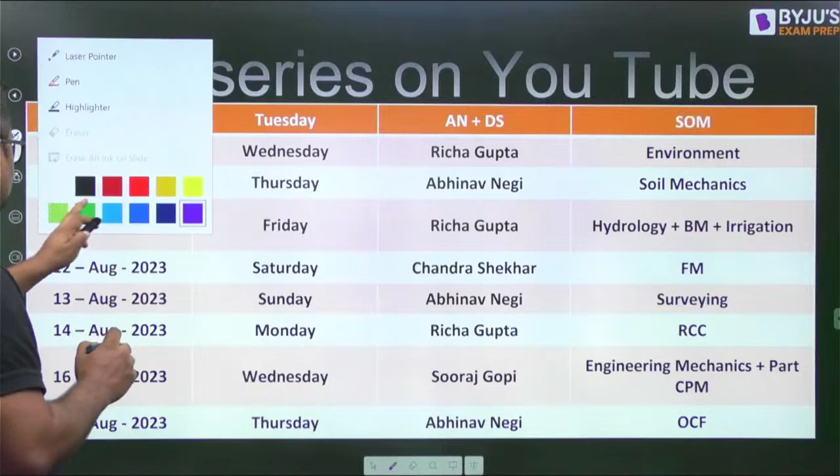Now, me and Dheeraj sir are taking SOM. The next day will be Richa ma'am for environment, then soil mechanics, then hydrology. Every subject will be done, guys. This is very important because there is no text book of MSQ available till now.

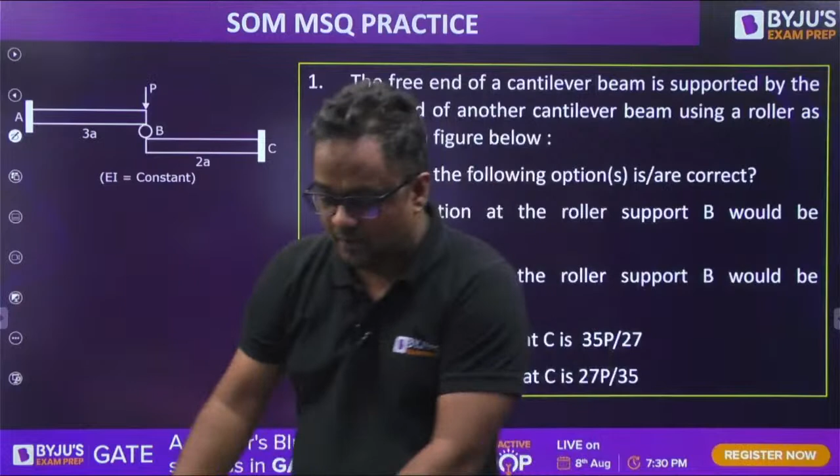Now, me and Dheeraj sir will be taking the questions. Let me take a couple of questions, question number 1 and 2, and then Dheeraj sir will come with a super duper MSQ question. Everybody please let me know your answers in the comment section. Take your copy and pen along with you so you can answer faster. If somebody is on the bed watching the session, please take the most advantage.

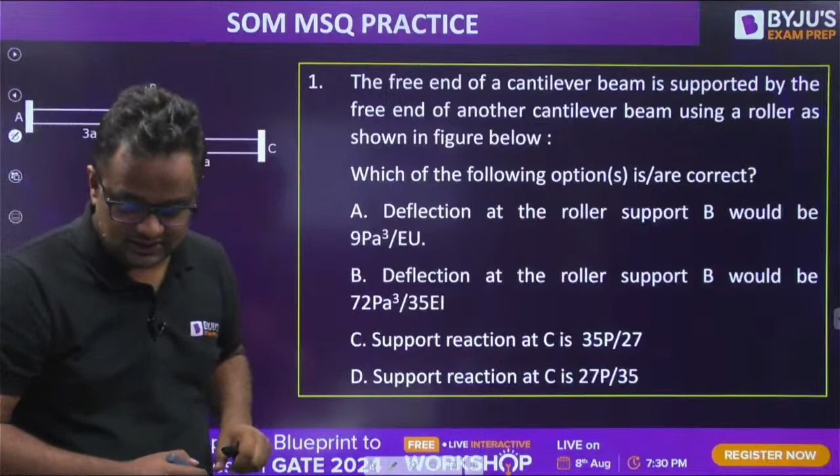We were asked which of the following is correct. So if I draw the free body diagram, this is A, this is B, and in B this P load is acting. This is C here, and this is B here. Now, if it is touched by a roller support, there will be a reaction here, equal and opposite on both sides. This is R. Now, as both of them are jointed like this...

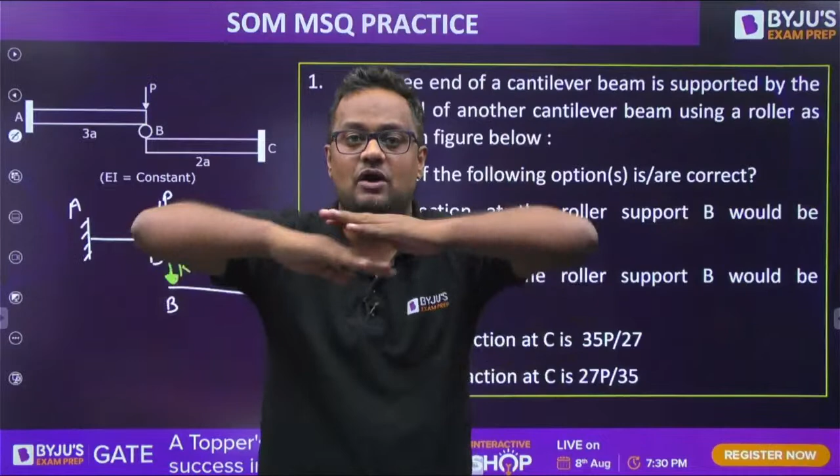So if it is going down, then my right hand and left hand go down by the same amount, since they are joined by the roller here. If they are going down, then both hands move down by the same amount, guys.

Now the deflection of both will be the same. So the deflection here will be P minus R, times distance L cube, that is 3A whole cube by 3EI. And the deflection here will be R times L cube, that is 2A whole cube by 3EI. Now, solving from here, what is the value of R? The R value is 27P by 35.

Now the deflection of the roller support at B. Put R here or here, both are equal sign. Either put here or here, you will be getting the B option.

Give me yes or no in the comment box, guys. Have you enjoyed this question? Everyone tell me. Okay, let me drink the water that Dheeraj sir has brought.

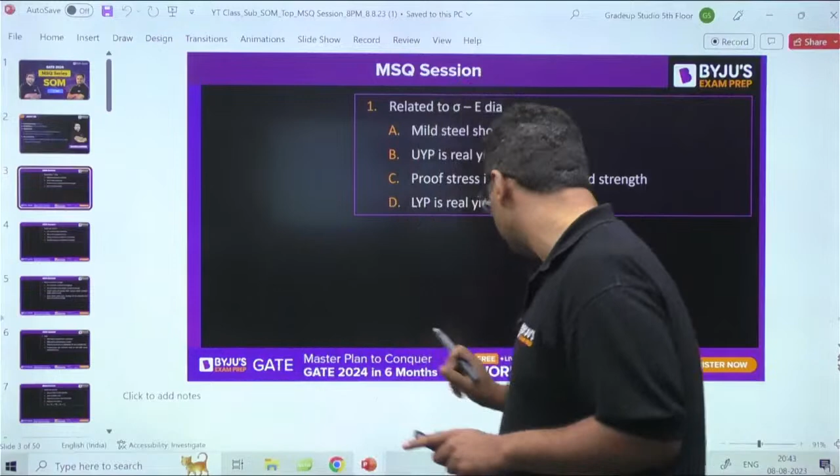Okay, so let us see. Abhinav sir would be joining after 5-7 minutes, let us see 5-7 questions here. This is related to the stress strain diagram. I have made majorly conceptual questions because students shared that they are facing issues in the MSQs which are related to concepts rather than numericals. So taking that into account, out of 50 questions, 30 are theoretical and 20 are numerical.

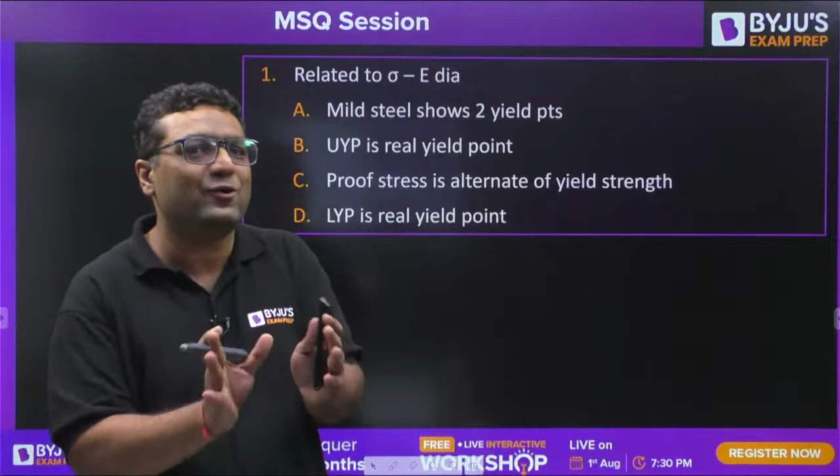So Vinod is saying ACD. The question is related to the stress strain diagram, so they are asking about it. The first option is mild steel shows 2 yield points. Upper yield point is the real yield point. Proof stress is alternate to the yield strength. Lower yield point is the real yield point. So what do you feel out of the 4? Alekia saying ACD, Parth saying ACD, Kiran saying ACD, Abhishek Thakur - what is your answer, Abhishek?

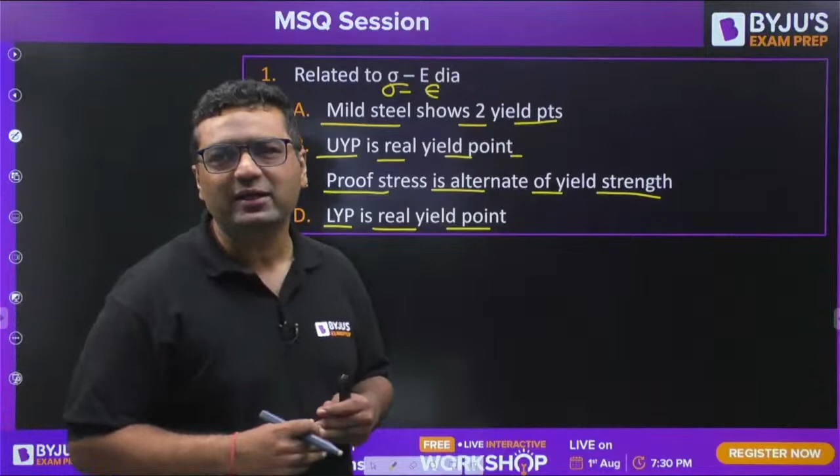So guys, majority of you are getting the answers as ACD. Let us see whether they are correct or not.

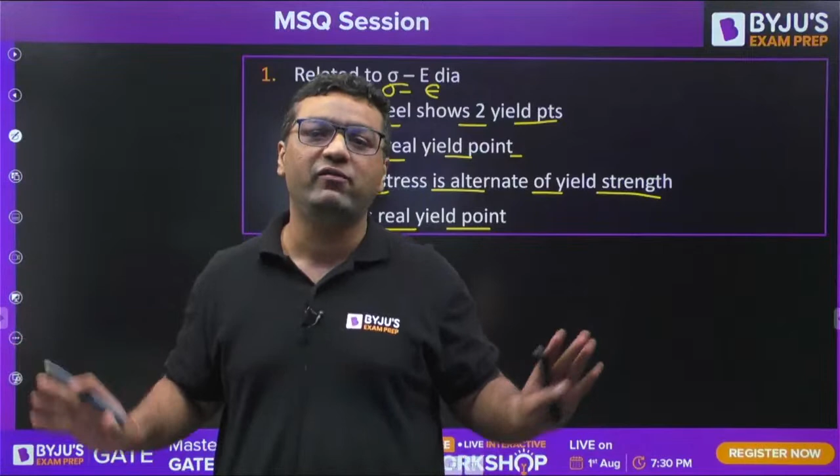The first answer is mild steel shows 2 yield points. I would like to say, in this universe, mild steel is the only material which shows 2 yield points. There is no other material which shows 2 yield points. So guys, that is why A is correct.

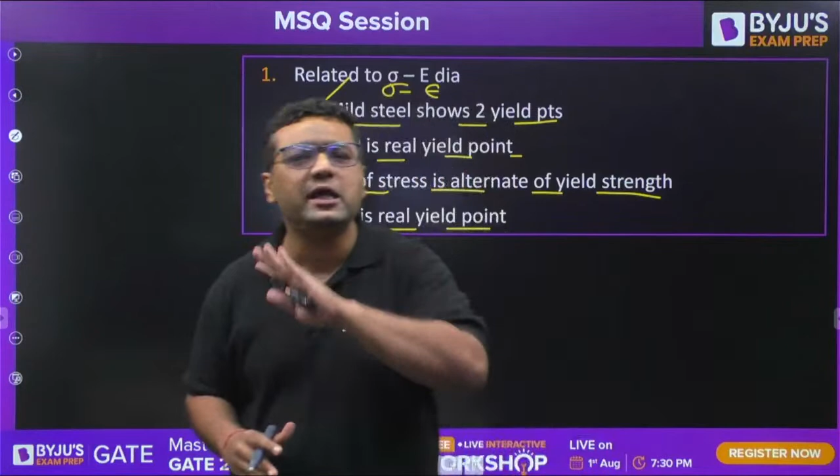Second is upper yield point is the real yield point. No, upper yield point is not at all the real yield point. Why? Because when we talk about upper yield point, it changes when you change the machine, it changes when you change the component, it changes with the environmental condition. And property is independent of all these factors. That is why B is going to be a wrong answer.

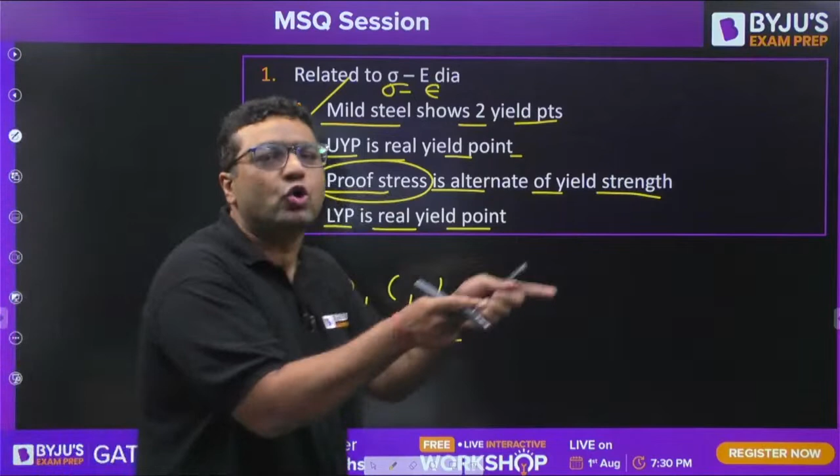Then, proof stress is defined for those materials only which do not show a clear yield point. That is why proof stress is an artificial yield strength for the material which does not show the clear yield point. So that is why C is correct.

And guys, lower yield point, yes, it is the real yield point. And whenever you say the yield stress SYT, that is corresponding to the lower yield point only, because that is the real yield point of the material.

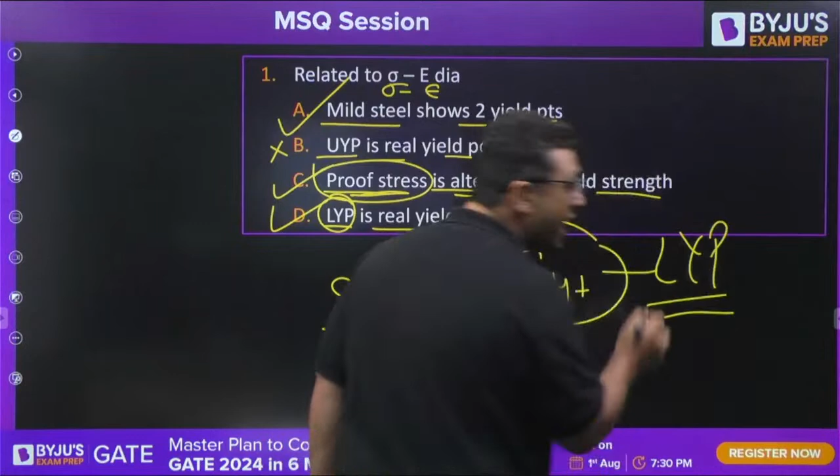So guys, moving to the second question, it is related to the properties. So sir has taken majorly numericals, I have taken conceptual questions.

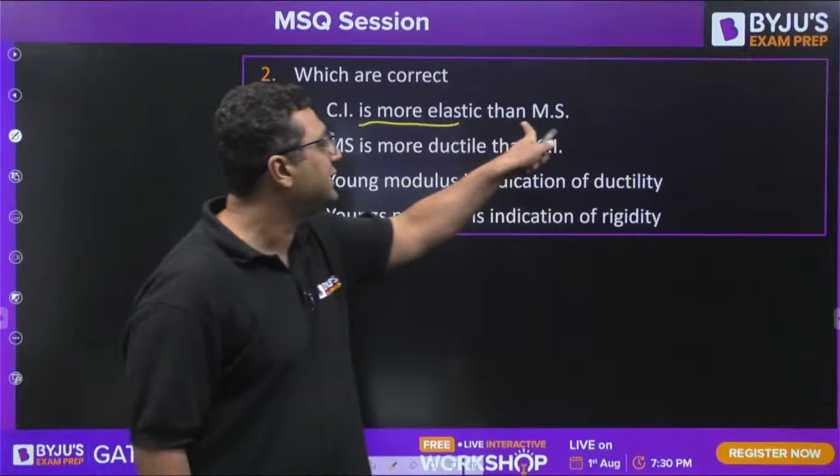So this is the second question, guys. Cast iron is more elastic than mild steel. Then mild steel is more ductile than cast iron. Then Young's modulus is the indication of ductility, and Young's modulus is the indication of rigidity. What do you feel, guys?

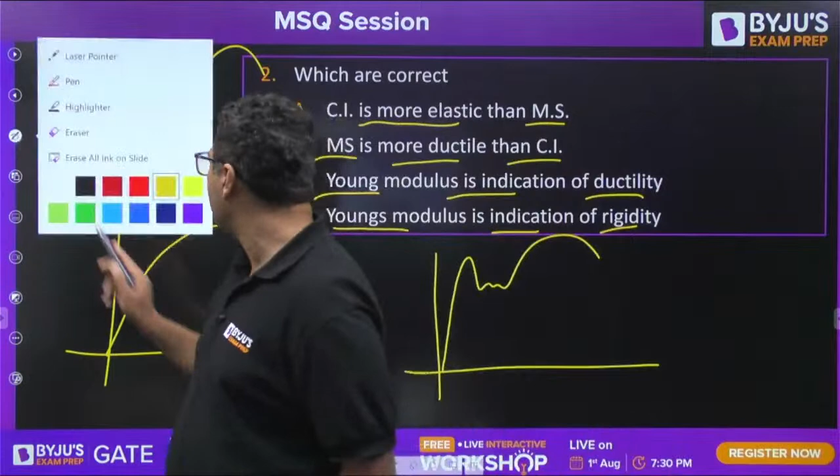This is the stress strain diagram for mild steel, and this is the stress strain diagram for cast iron. If you want to superimpose them, this is for mild steel, and for cast iron I will show with a different color. It is going to be like this. So you can see, this is the slope of cast iron, this is the slope of mild steel. That will give you some idea about the answer. We know this, Alekia is saying B and D.

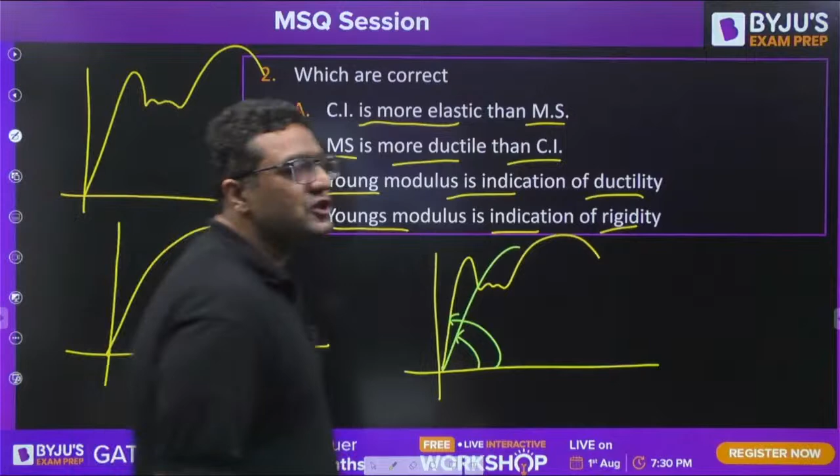So first of all, we will see that, is cast iron more elastic than mild steel? Which material is more elastic, which is less elastic? It is given by their elastic region.

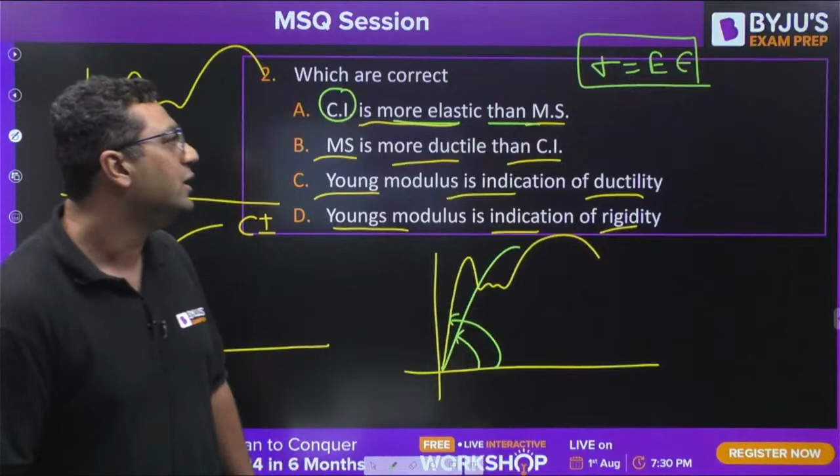If I ask you sigma is E times epsilon, can you tell me, is it valid in the elastic region or plastic region? When we are talking about Hooke's law, is it valid in elastic region or plastic region? Sigma is E times epsilon, that is Hooke's law. Please tell me, is it valid in elastic region or plastic region? It is valid in the elastic region.

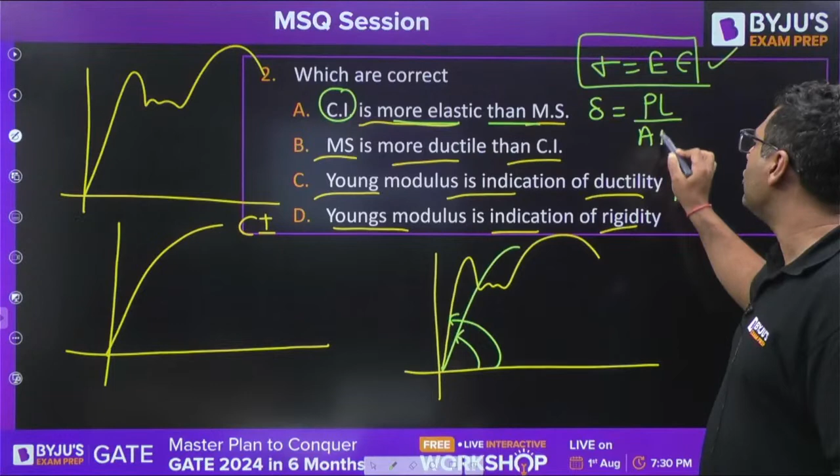You are aware that delta is going to be PL upon AE. You know that from this formula you will be getting delta is PL upon AE. And if E is going to be more, then this deformation will be lesser. So if we are considering the same load, if E is going to be more, delta is going to be lesser. So what do you mean by that?

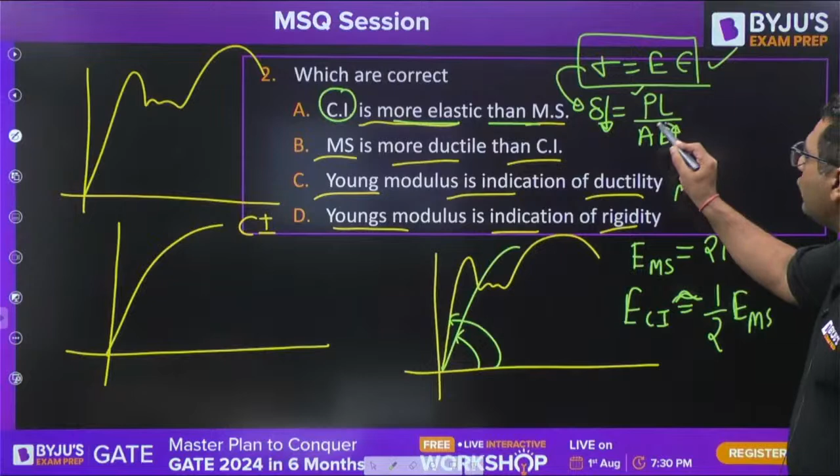What do you mean by that? I would like to say, for mild steel, when we find out the Young's modulus, it is coming out to be 210. And when we talk about cast iron, it is coming approximately half of mild steel. So it means Young's modulus would be lesser for cast iron. And if it is lesser, obviously the deformation will be more.

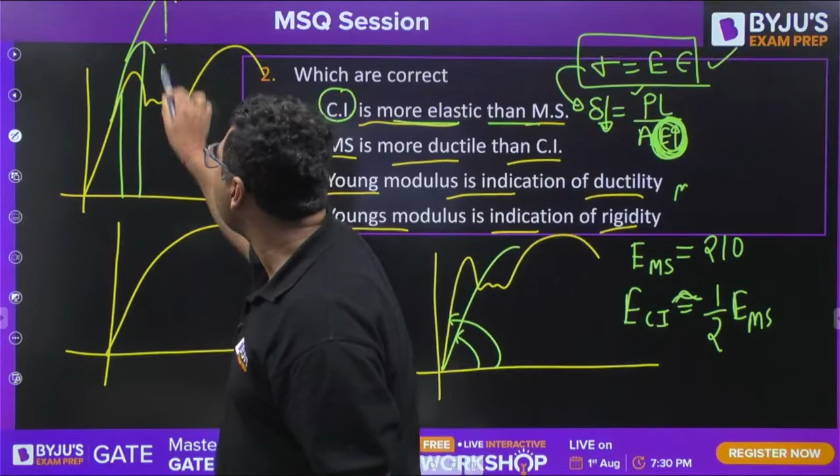And if elastic deformation is going to be more, we will say cast iron is more elastic than the mild steel. Generally students have doubt here. Elastic deformation cast iron is showing more. Even if you compare low carbon steel, medium carbon steel, high carbon steel, you will see this is for low carbon steel, this is for medium carbon steel, this is for high carbon steel. You can see the elastic deformation is more for medium carbon steel, even more for high carbon steel. So whenever we are talking about cast iron, it is more elastic than that of the mild steel.

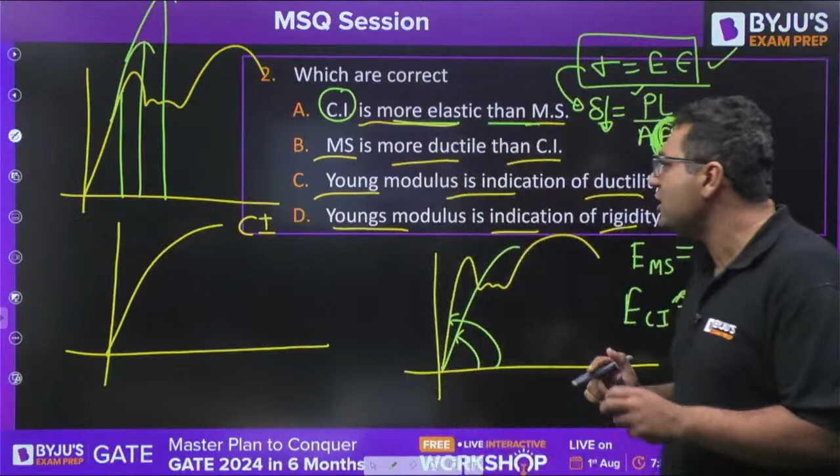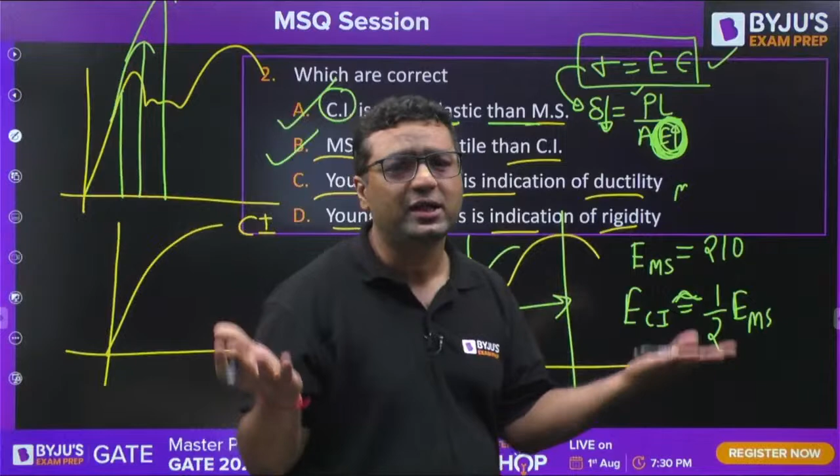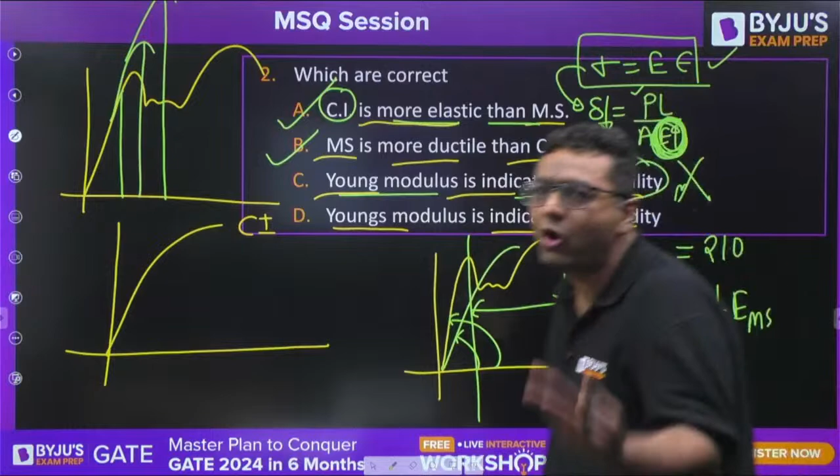And when you talk about ductility, ductility is shown by the plastic deformation. Like this is going to be the plastic deformation. So plastic deformation is more for the mild steel or the low carbon steel. So yes, cast iron is more elastic than mild steel, and mild steel is more ductile than cast iron, because plastic deformation is shown by mild steel and elastic deformation is shown more by cast iron. Then, Young's modulus is the indication of ductility? No, because Young's modulus we are not defining in the plastic region, whereas ductility means the permanent deformation only. So that is why C is wrong.

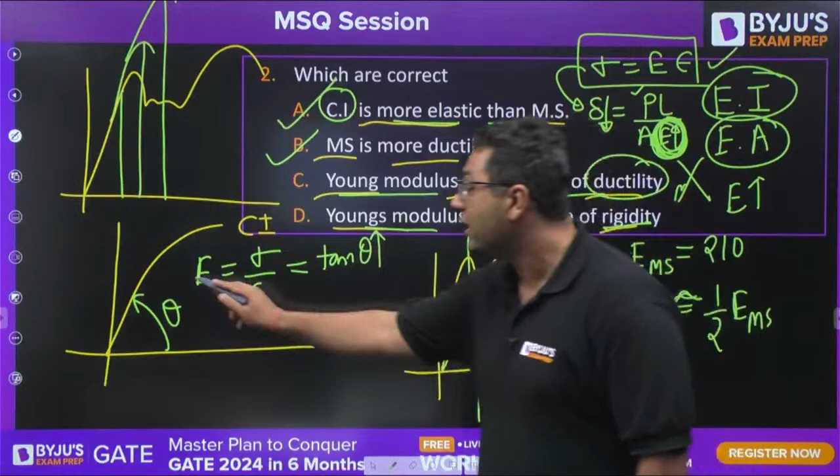Young's modulus is indication of rigidity. Yes, you say E into I as the rigidity, you say E into A as the rigidity. This is axial rigidity, this is flexural rigidity. So if E is going to be more, rigidity will be more. If the slope of the curve is more, you know that Young's modulus is defined as stress by strain. If this angle is theta, Young's modulus is nothing but tan theta. So if theta is more, tan theta will be more, Young's modulus will be more. More theta means the curve will be going towards the y-axis.

At y-axis, what is the value of strain? At y-axis, what is the value of x? Guys, please answer it. What do you feel? Anybody? Abhishek, Parth, Alekya, Vinod? Yes. What is the value of x on y-axis? Is it 0?

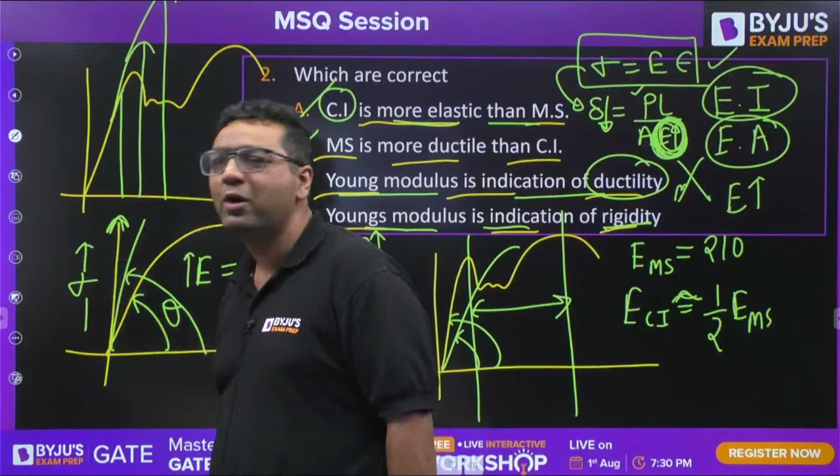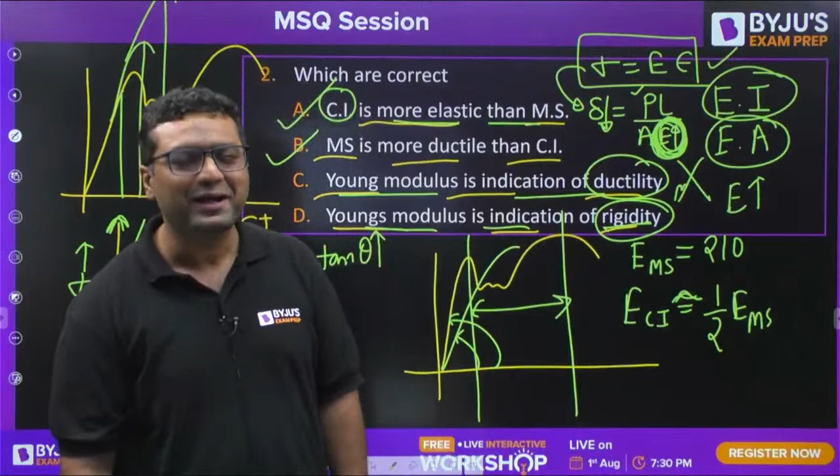So if on y-axis x is 0, then on the stress axis strain is going to be 0. So if strain is going to be 0, what do you mean by that? The body is going to be rigid. That is why Young's modulus is the indication of rigidity. If Young's modulus is more, the body will be moving towards rigidity, as it is going to take the body towards the y-axis.

Okay, so moving to the next question. After that question, Abhinav sir would be joining us. So guys, let me take some other question now, because otherwise you will be saying sir is taking all the theoretical questions.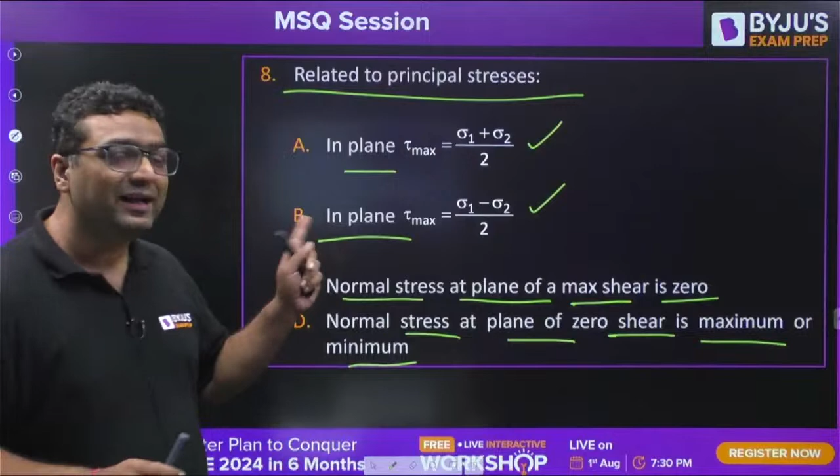Yes. So Parth is saying B and D are the right answers. Kiran is saying B and D. Okay. Who is Papa ka pagal son? Papa ka pagal beta. Okay. So BD. Vinod is saying BD. Alekya, what do you feel? What should be the answer?

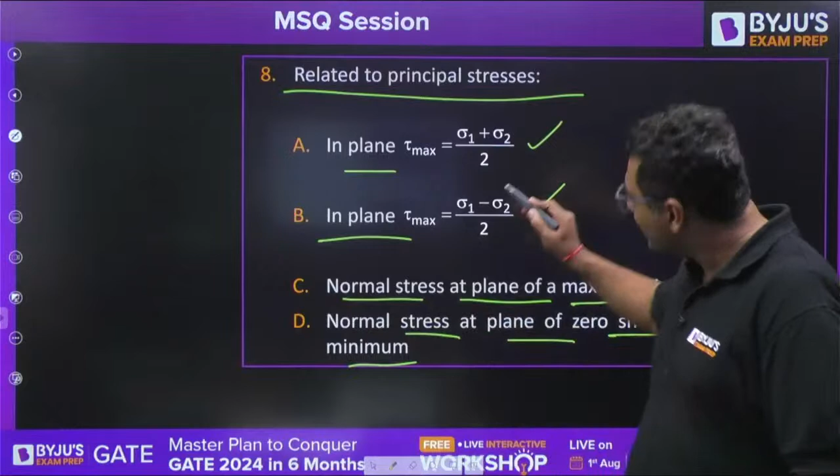So guys, if we see the tau max value, tau max is given as sigma 1 minus sigma 2 by 2. That's why B is correct and A is wrong. Then we are talking about normal stress at the plane of maximum shear. Always remember normal stress at the plane of maximum shear is given by sigma xx plus sigma yy by 2, or sigma 1 plus sigma 2 by 2. So it cannot always be 0. It will be 0 only when the center of the Mohr circle is at the origin. So C is wrong.

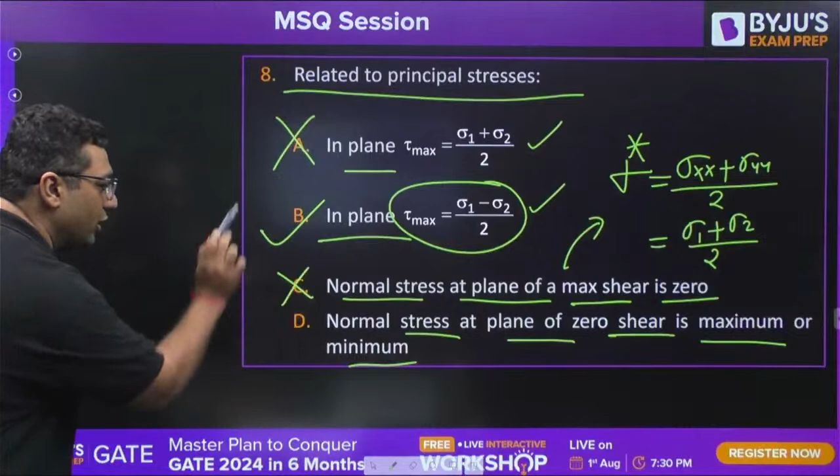And normal stress at the plane of zero shear: yes, they are said to be principal planes, and at principal planes, no doubt the normal stresses are either maximum or minimum. So you guys are correct. The answer is going to be B and D.

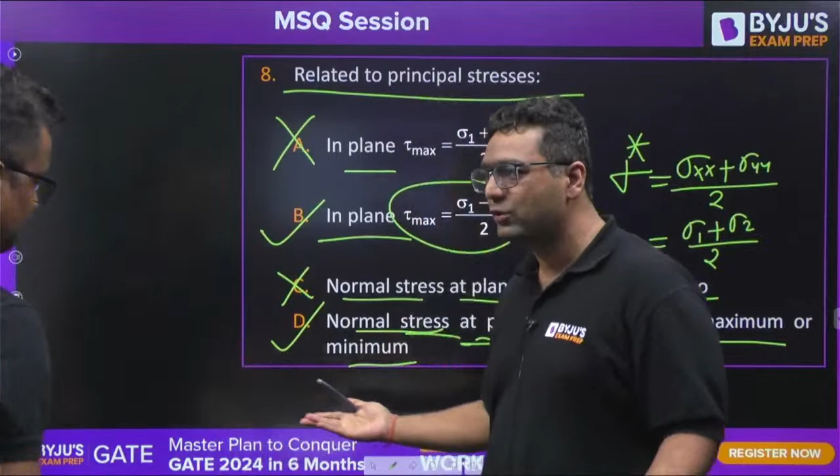Now I will once again invite Abhinav sir. Sir, please continue the session. I have class from 9 p.m. Okay, sir. Yes. PPT.

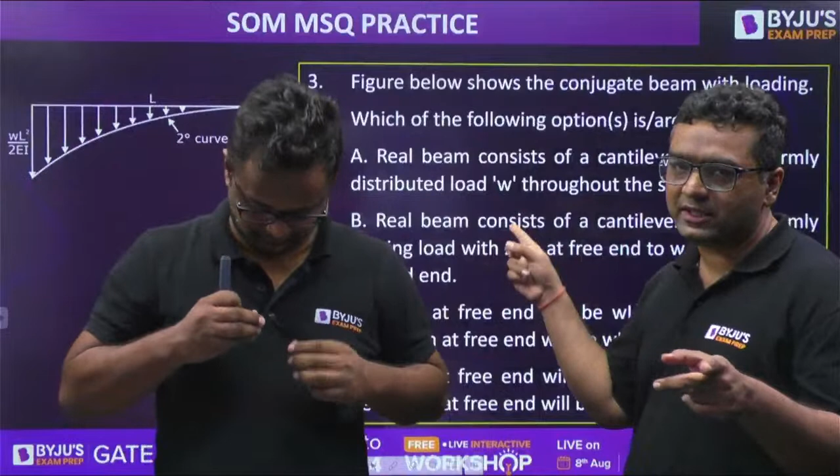Okay, guys, now the question is in front of you on the board. Please let me know the correct answer. This is the conjugate beam. What will be the real beam? Let me move a little to the side, like this. This is the diagram of the conjugate beam.

In the real beam, the free end is the fixed end, like this, and the fixed end is the free end, like this. And the UDL will be acting on this. Why do I know this? Because if I draw the M by EI bending moment diagram, it will be like this, and whatever is the M by EI diagram, that will be the loading diagram here.

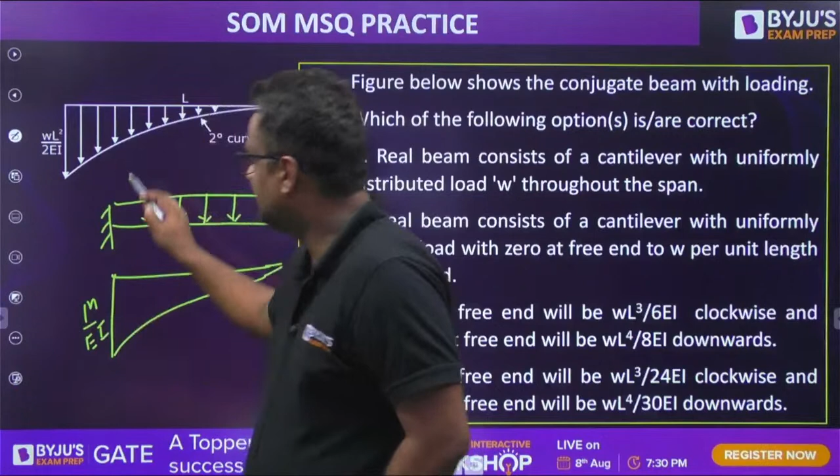So the real beam consists of a cantilever with a uniformly varying load from 0 at free end to W? No, why varying? It will be a UDL, uniformly distributed load. Because when loading is UDL, constant, that is 0 degree, SFD will be 1 degree and BMD is 2 degree. So this is the 2 degree. Whatever is the BMD in the real beam, that is the loading diagram in the conjugate beam.

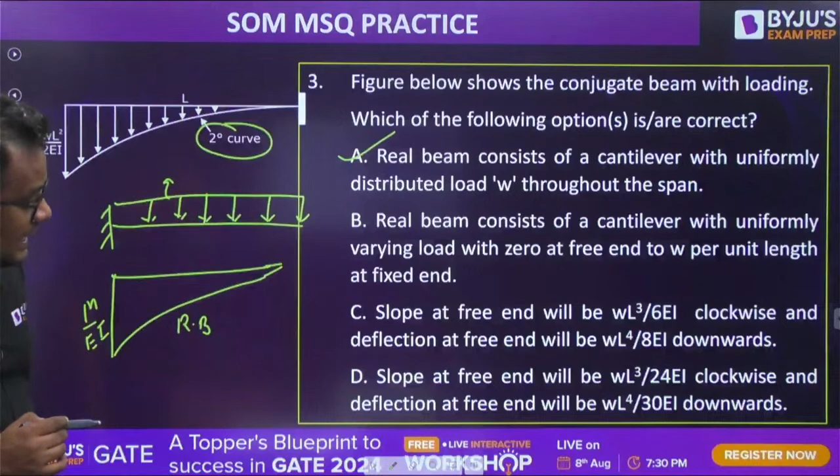Now for this UDL, the slope at the free end is WL cube by 6EI and deflection is WL^4 by 8EI. So the correct answer will be A and C.

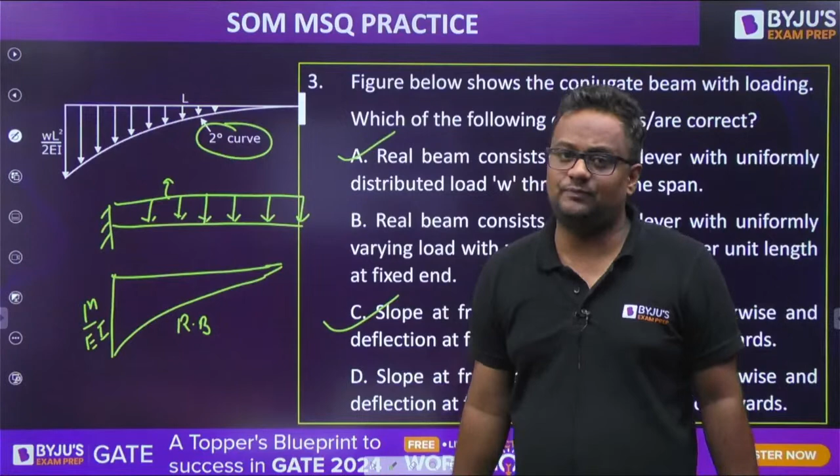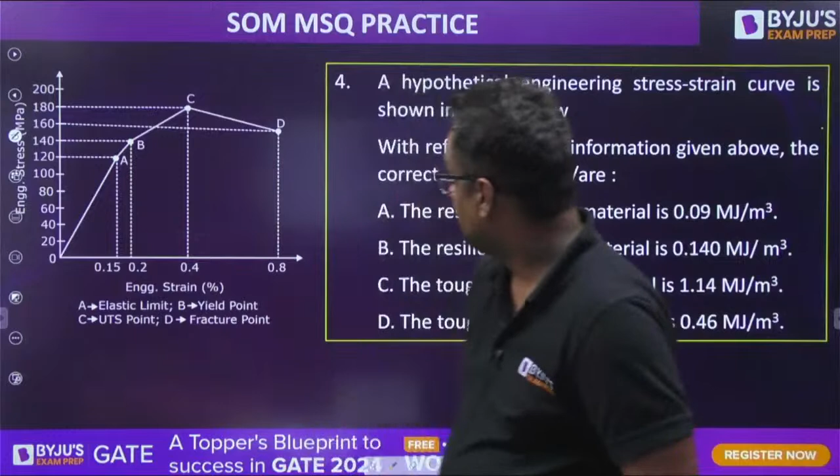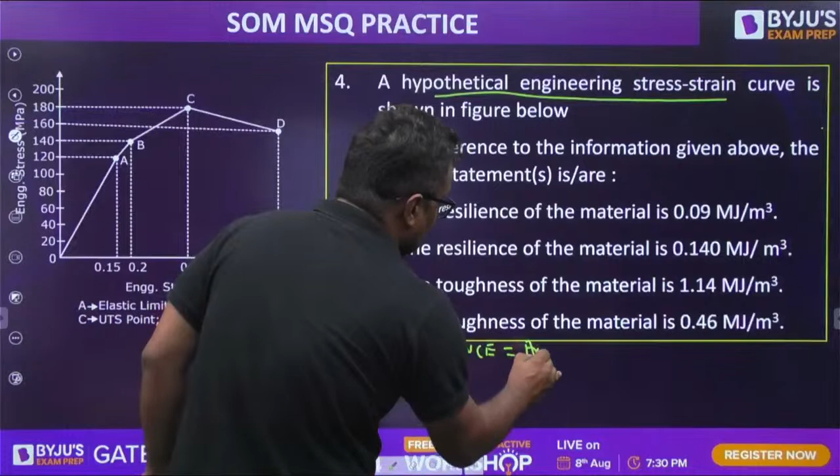Okay, now this is the question, guys. I want to check who can do this. The stress strain graph is given, and with the help of the hypothetical engineering stress strain curve, the resilience and the toughness are asked. What is resilience? Resilience is the area of the stress strain curve up to the elastic limit.

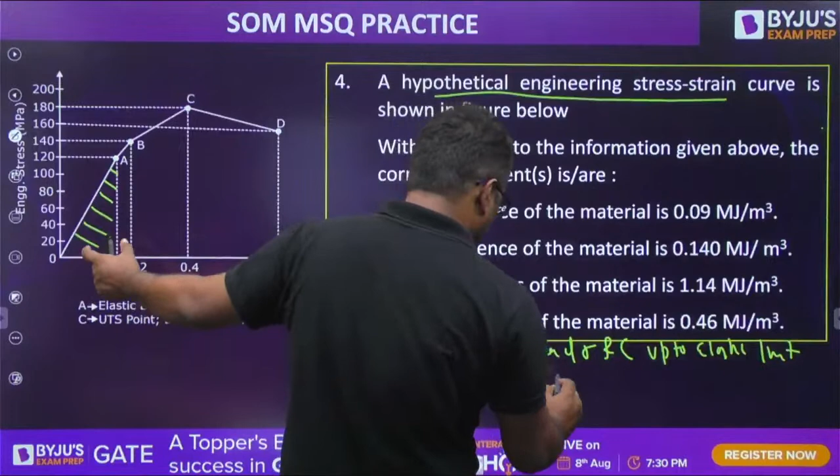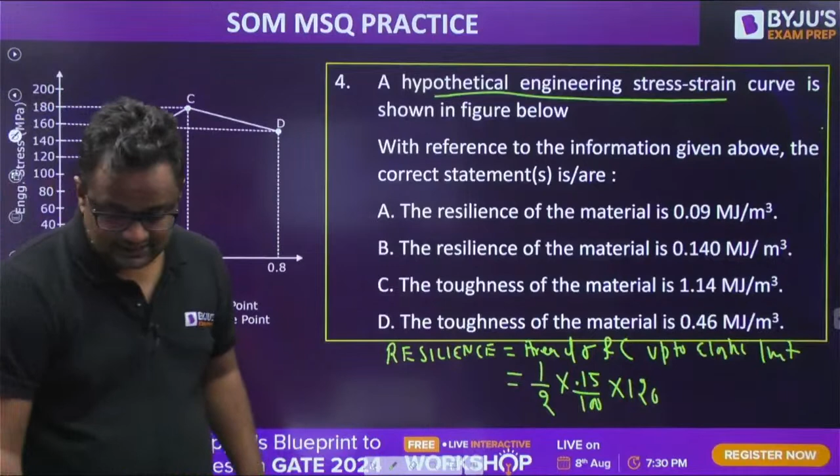So what is the elastic limit? A is the elastic limit. So this area is a triangle, half. If you write the base as 0.15, it will be wrong, because this is in percentage. So you have to divide 0.15 by 100 into height. Height is 120 megapascal. So in megajoule, are you getting the answer as A?

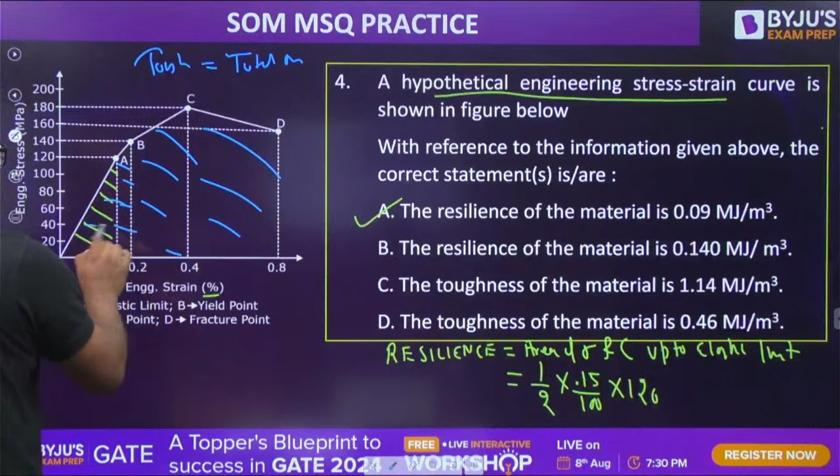Toughness calculation is lengthy. What is toughness? Total area. So this triangle plus these trapeziums, that will be the toughness, and that value is coming out to be 1.14. That is option C.

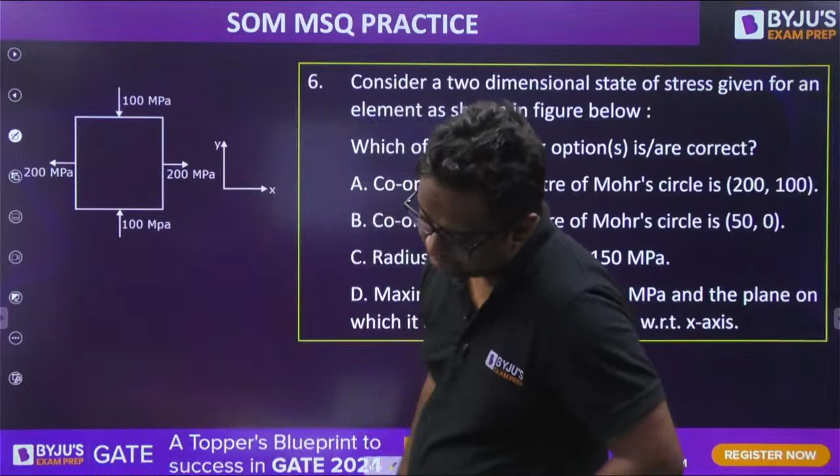Let us move to the next question. Question number 5, take it as homework, because we have done the same question. Now this one you can do. I'm quite sure you will be able to do this. Everyone give an attempt and let me know the answer. The figure is given. Coordinates of center is how much? Show me your answers in the comment box. I want to check your answers. Come on.

Tell me the coordinates of the center, quickly. Sigma x plus sigma y by 2 comma 0. So sigma x is 200 and sigma y is minus 100, compression. So 200 minus 100 by 2, it will be 50 comma 0. So that will be option B.

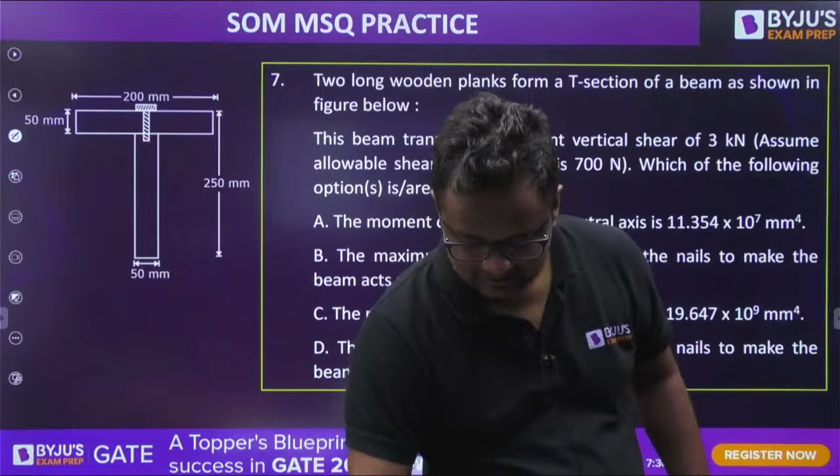BCD. Everyone did this? Have you done this? Should we move to the next question? Yes. This is now typical. Let me check who can do this. I will give you enough time to solve this.

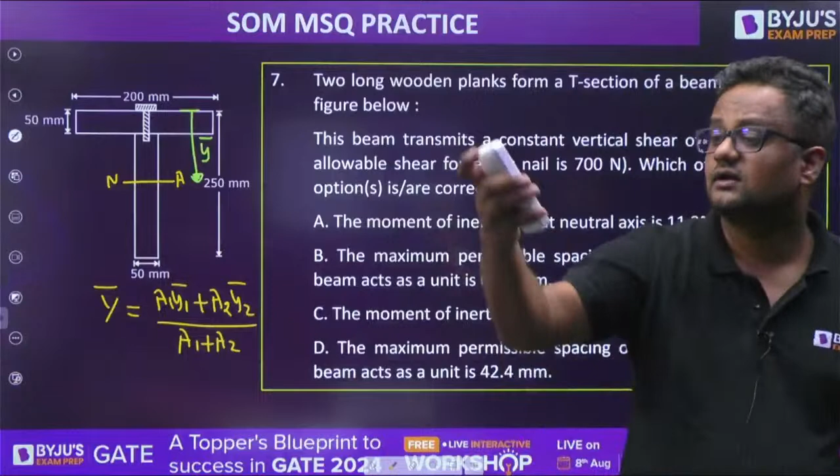Okay, first of all, find out the neutral axis. Let the neutral axis be at y bar distance from top. The neutral axis is the centroidal axis. Centroid is found out like this: A1 y1 bar plus A2 y2 bar upon A1 plus A2. Correct? Now what is A1?

Above area is 200 into 50. Now the y bar of this is at 25, plus A2. A2 is 50 into 200. This is 50 and that is 200. And center of mass of this is 50 plus 100, that is 150, upon A1 plus A2, 200 into 50 plus 50 into 200.

Tell me what is the answer coming? Is it coming 87.5 mm from top? This distance is 87.5 mm from top. Okay, please check.

Then find I, moment of inertia about neutral axis, that will be BD cube by 12 of this, that is 200 into 50 cube by 12, but we have to shift it here because we want the moment of inertia about this axis. So plus area into h square, the parallel axis theorem. Area is 200 into 50 into the distance square. This distance is 87.5 minus 25.

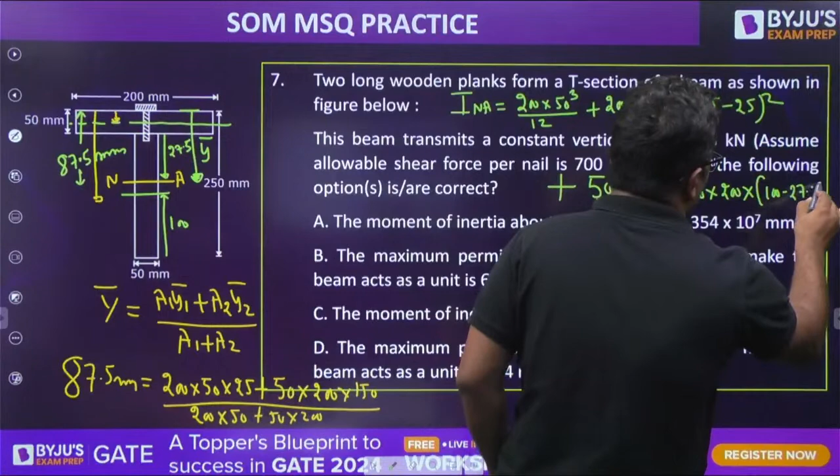What is the answer you are getting? Can you please let me know? 11.354 into 10 की power 7. Yes, it is a calculative question. Same type of question has been asked in civil engineering in GATE 2023. Now the moment of inertia is done, so A is correct, so C will be wrong.

Now the maximum permissible spacing is required. For this, first of all, we'll find shear stress per unit length, that is shear flow, S A y bar by I. This is found for this region, because the nail is connecting that region with the web. So what is the shear force? 3 kilonewton. So 3000 into area. Area is 200 into 50.

And what is the y bar of this portion? This is connecting this, na? So the distance of the above area's center of mass from neutral axis: 87.5 minus 25, na? How much it is?

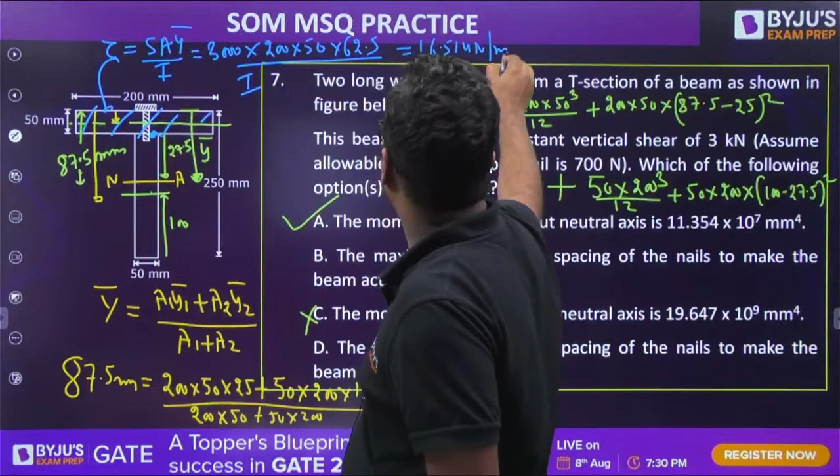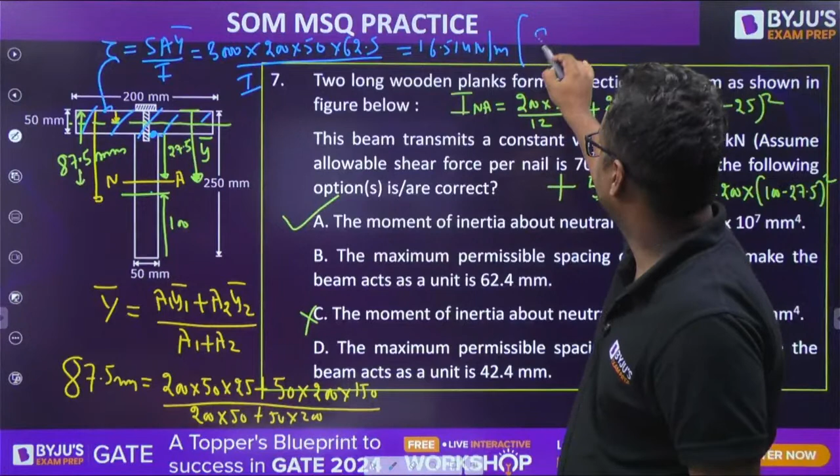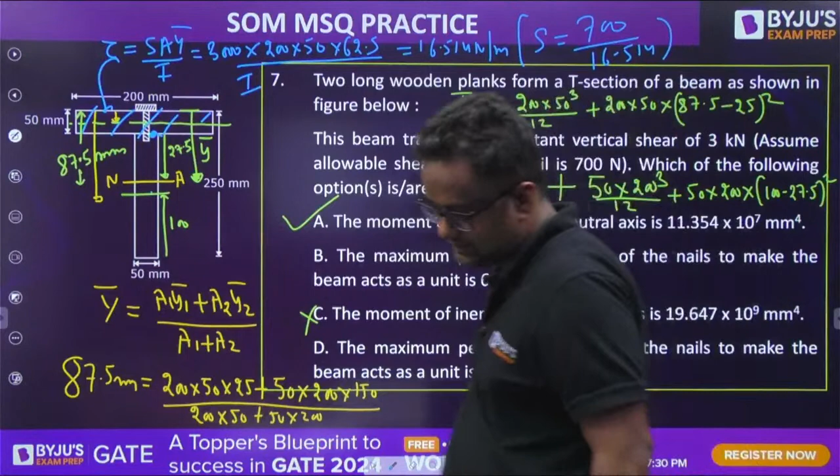So spacing is, what is the permissible? Allowable 700 divided by 16.514. So how much is coming? 42.4 is coming. Please check. This is the level of question, guys.

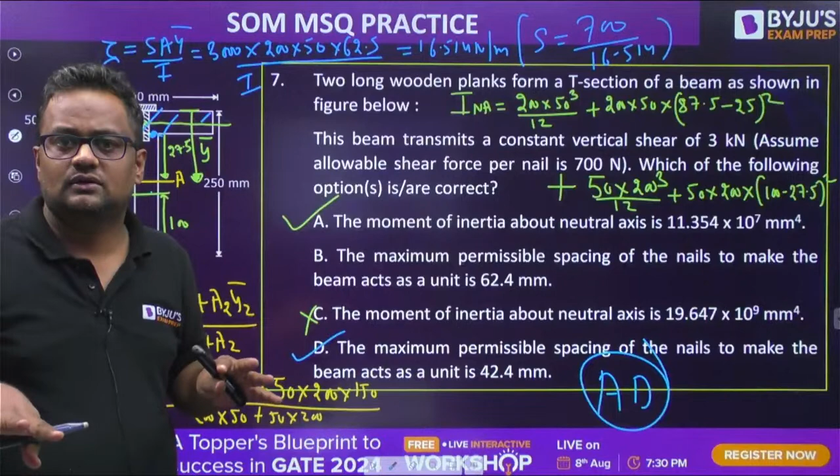Okay, guys, there is no different planning for MSQ questions. Same concepts are required. But you have to check. See, in MCQ only neutral axis will be asked or only spacing will be asked. MSQ has no different strategy. NAT, MCQ, MSQ, anything has no different strategy. Only the concepts will be required, guys.

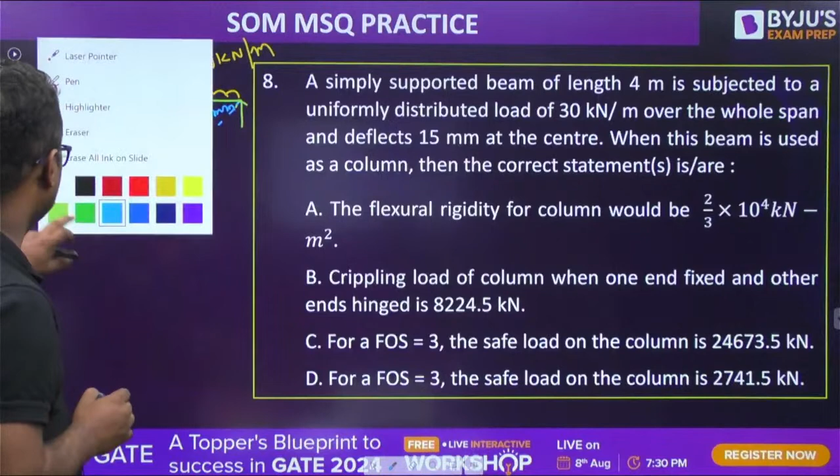Now question number 8. A simply supported beam of length 4 meter is subjected to uniformly distributed load of 30 kilonewton per meter over the whole span. It is deflected 15 mm at the center. So deflection here is 15 mm. Then the correct statements are, tell me the answer.

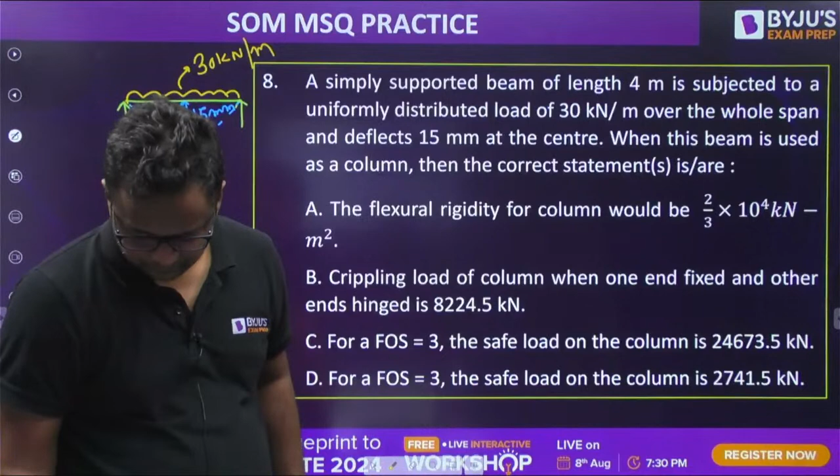This you can do. Chalo. Delta at center of a simply supported beam is 5WL^4 by 384 EI. Correct? Delta is known. W is known. Length is known, 4 meter. From here you will get EI. Please check the EI value you will be getting as 2/3 into 10 to the power 4 kilonewton meter square. So you will be getting A option.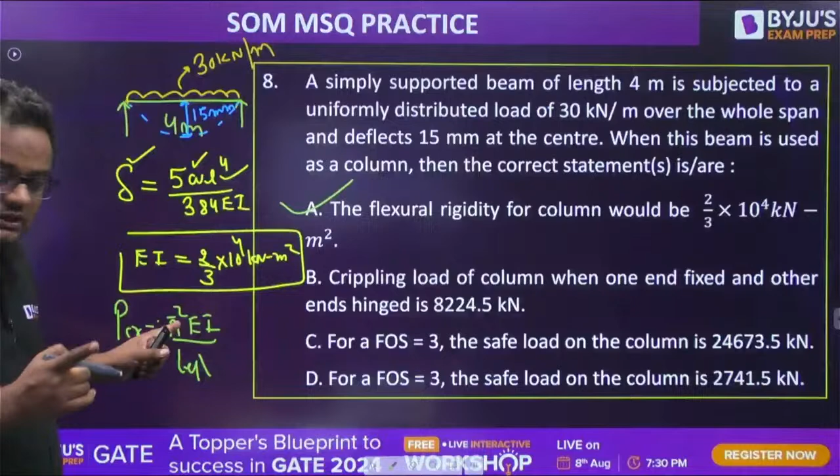Okay. What is asked next? Crippling load. PCR is equal to pi square EI upon L effective square, although there is N square also, but if nothing is mentioned, N is 1. Pi is known, EI is known. What is L effective when one end is fixed and another is hinged? L by root 2.

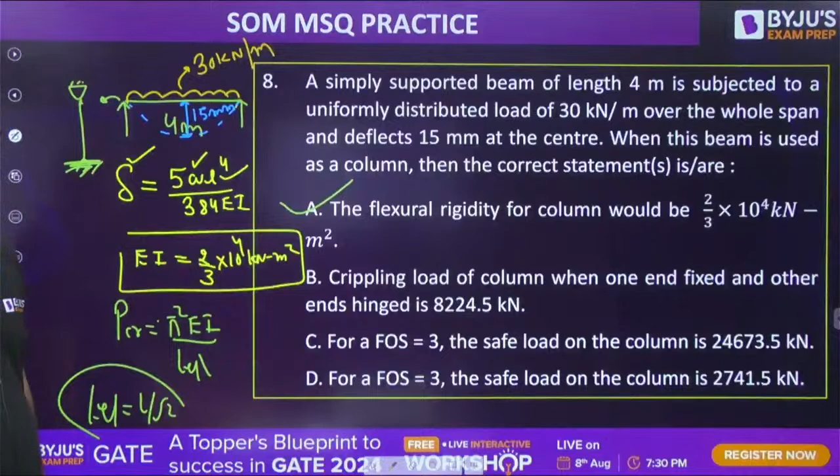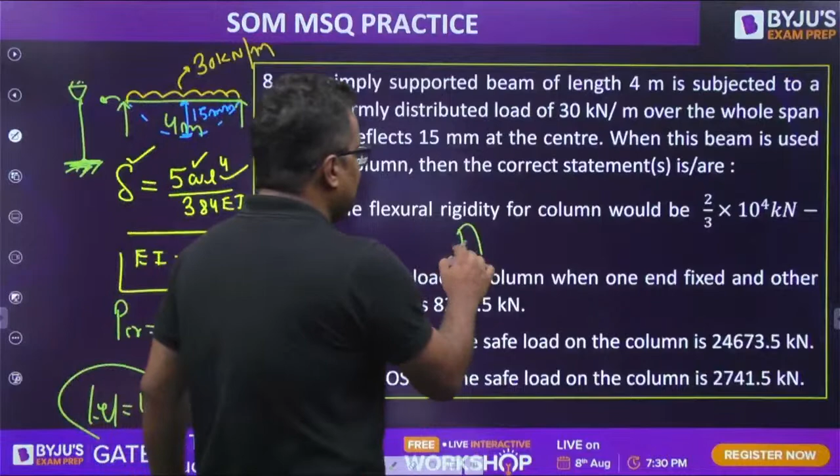Now it is column, guys. The same beam is made like column. So L effective is L by root 2, and L is 4 meter. If you put here, the value you will be getting is 8224.5. That is B option. Now for a factor of safety 3, divide this by 3. So it will be D option. So A, B, D.

Have you got it? Please let me know, friends. All of you. Any doubt? ABD, someone is saying.